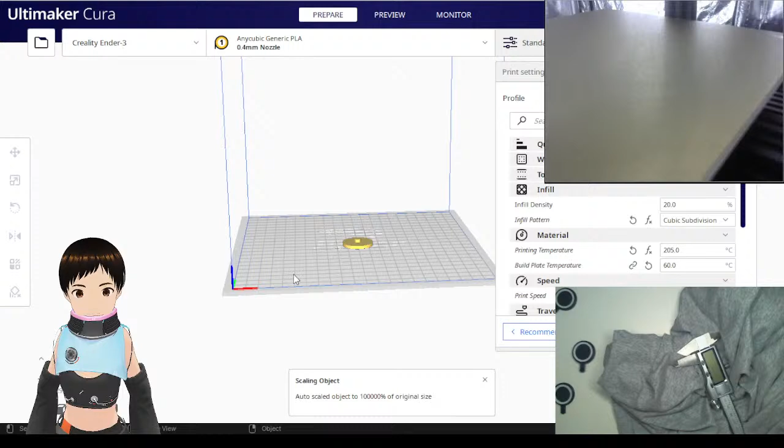Ta-da! Okay, so this is Ultimaker Cura, and this is gonna be the button that we'll be printing. This program is for translating 3D files into a printable format for the 3D printer to be able to 3D print stuff. Colloquially, it's typically called a slicer because it slices the 3D model into a layer-by-layer format that the 3D printer will understand, so it'll print layer by layer.

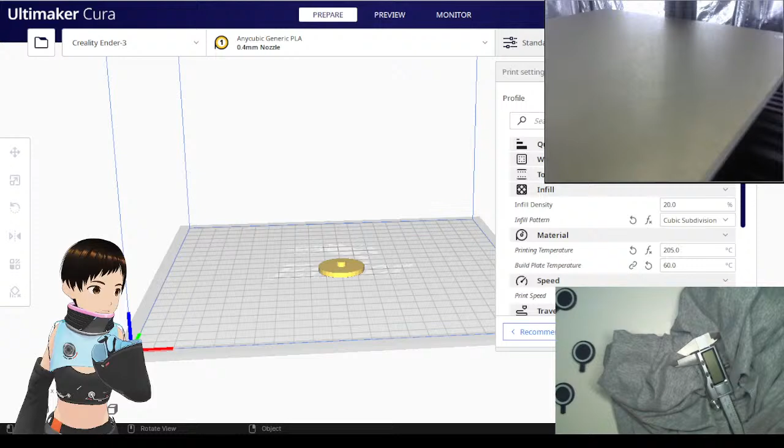So if we hit slice, we'll get an estimated time. Oh, the hand cam is covering it. There, so we'll see an estimated time of about 10 minutes. It'll take 2 grams to print, and if we preview this, you can sort of see how the layers are printed.

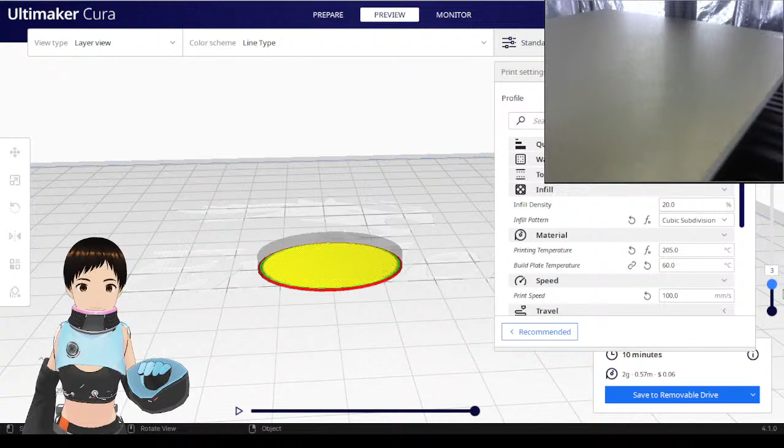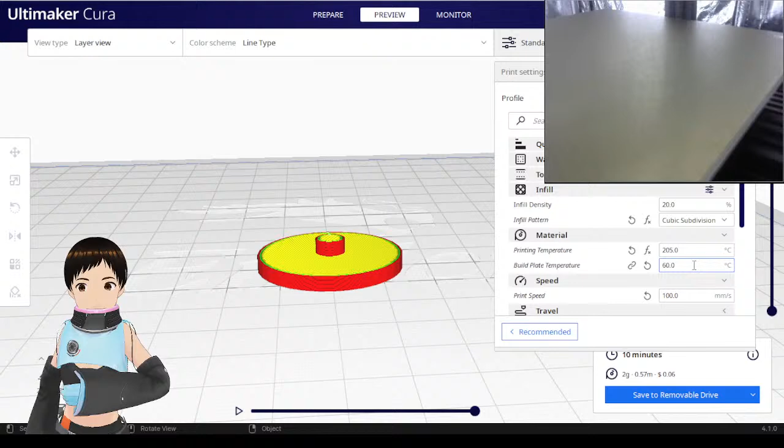Right, so it'll go layer by layer. There's a 20% infill, so it'll only fill in 20% of the volume. You can change the temperature of the nozzle that's extruding the plastic for printing. You can change the temperature of the plate, the print speed, and all this stuff.

And all that stuff you should only be changing based on tests that you can run yourself, in order to figure out what is the optimal speed and temperature required for fast printing at good quality. There's a lot of tweaking that needs to be done for a 3D printer.

The hobby, I feel, is split between people who are buying a printer for the sake of making 3D printed products, and those who are getting into it for the sake of working with a 3D printer. It's like if you bought a paper printer but had to assemble the printer yourself. That's sort of what it's basically like.

There are some 3D printers that you just buy and it's good to go, you just set and forget, but even then you need to run calibration tests in order to test out, like, if I want to print super fast, what temperature do I need to heat up the plastic in order to extrude out of the nozzle quickly enough, and other stuff like that. Anyways, enough of that.

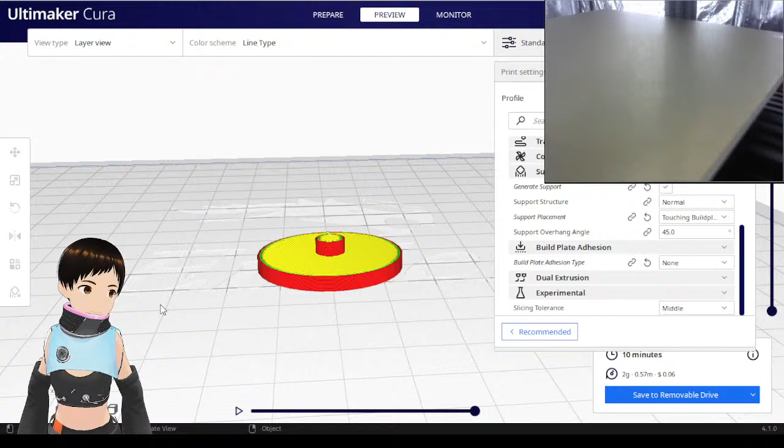We are printing this. It'll take 10 minutes, and it'll probably take a little longer for me to go downstairs and set it up. So we're just gonna rewrite the file name with 2 grams, 10 minutes, just so that I know what I'm printing when I go down to the machine.

I'm gonna save it to my removable drive. And then... nope, um.

Oh, there, hi, chat's on screen now. Oh my gosh, I don't know what happened. Long, long time no see! Yay! I don't know why that did anything. Time to be perceived, that's right, you will now be perceived. Okay, um.

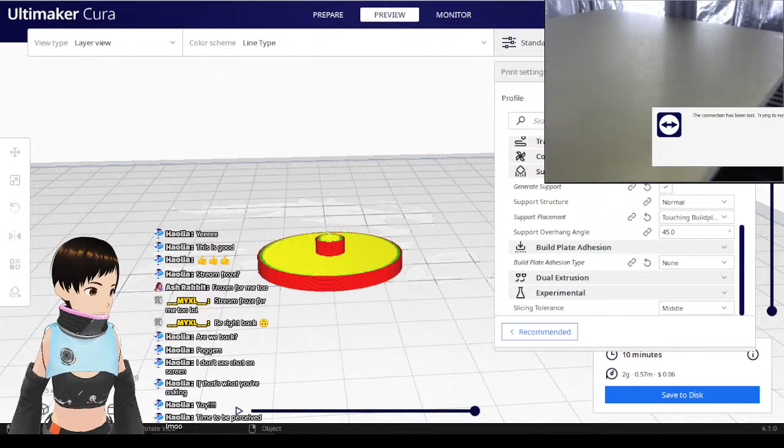Connection has been lost, what the? Huh, okay. Where am I? Okay, so I will be right back. Maybe I can make this bigger. Bigger, yeah, and it's gone. We will reconnect now, like, messy. No con- huh, wait, connection failed.

So we're currently waiting right now for me to reconnect to the camera that I have set up to monitor my 3D printer. Apparently TeamViewer is not responding. Okay, let's try this a third time.

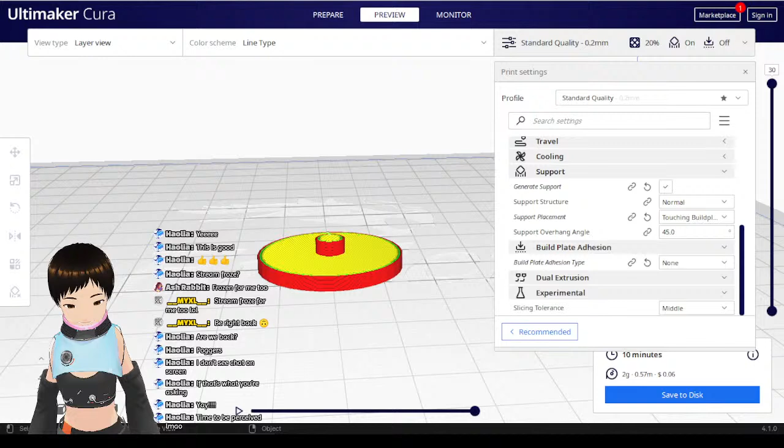Okay, so the 3D printer cam back online. I will be right back, and maybe I'll put some text on screen just to say... that's not what I want to say. I want to say hitting up 3D printer, stick around. Okay, I'm gonna go nonverbal for a bit, I'll be right back.